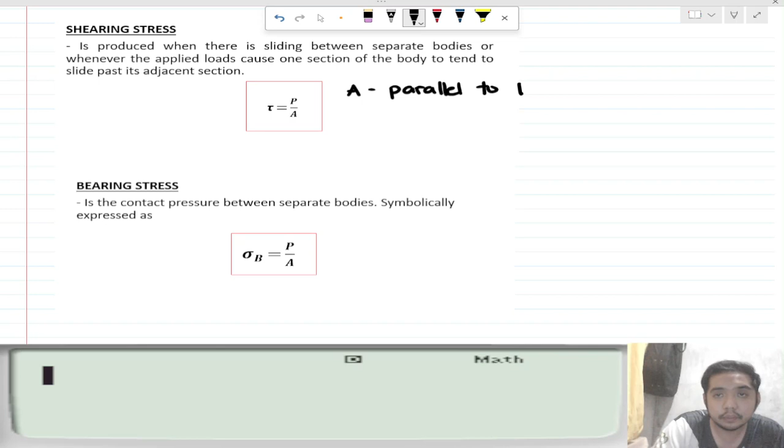Wherein yung ating area ngayon dito, yung area natin ngayon diyan sa ating shearing stress, okay, is parallel to the force, okay? So yun po yung pinagkaiba ng ating normal stress sa ating shearing stress. And shearing stress is represented by the symbol tau.

Okay, and then bearing stress, what is bearing stress? Sabi po dito, it is the contact pressure between separate bodies symbolically expressed as sigma B. So ito yung sinasabi ko sa inyo, wherein ang ating bearing stress ay isa din siyang normal stress, but ang difference nito is contact pressure lamang siya.

Ano, so yan, nakalagay naman diyan. Okay, so contact pressure daw yung ating bearing stress. Yan ay contact pressure between separate bodies. So yung isang body kumokontak doon sa isa pang body because of force applied to the contacting body, o yung body na nagko-contact doon sa isa, doon sa lumalapat sa isa. So yun yung ating bearing stress.

So parang ano lang din yan, normal stress, okay? Ang pinagkaiba nga lang, normal stress can be tensile or compressive. At itong bearing stress natin is always compressive or contact pressure. So sigma B ang ating symbol diyan, and yan ay P over A, wherein yung area natin diyan is perpendicular to the force or the area on the contact.

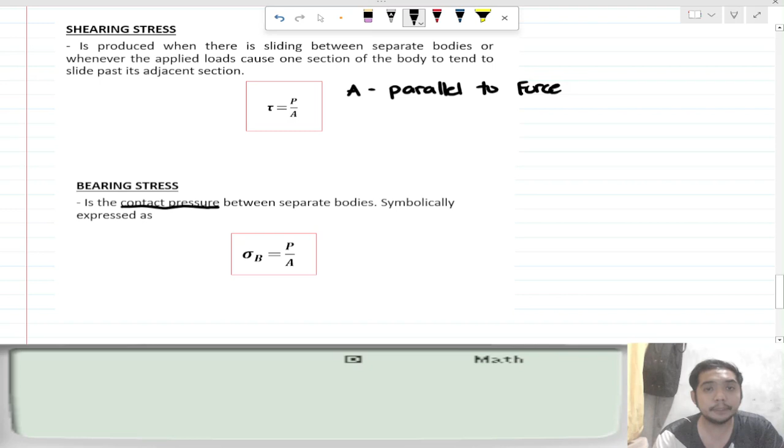Okay, so para mas maintindihan natin, sagutan natin itong ating problem. So sabi diyan, a rectangular piece of wood 75 mm by 150 mm in cross section is used as compression member as shown in the figure 1.4. Determine the axial force P which can be safely applied to the block if the compressive stress in the wood is 22 megapascal and the shearing stress parallel to the grain is 5 megapascal.

So ang drawing niyan, inside view, is nakaganto yan. At kitang-kita nyo naman, nakaganyan po. At then, naka-apply yung ating force dito. Okay, and then, ito daw ay 15 degrees. So ito, yung lapad niya is 75 and then yung haba niya po is 150.

So ngayon, yung ating force para magkaroon ng contact pressure or compressive stress, ito po yun. May component po dapat tayong naka-normal doon sa ating grain. At then, meron din tayong component na naka-parallel doon sa ating grain. So sabihin na lang natin na ito ay PN and then ito ay PS.

Okay, so sabi dito, yung ating tau, yan daw ay limited to 5 megapascal. At then, yung ating naman compressive stress, yan naman daw ay limited to 22 megapascals. Okay, so ngayon, para malaman natin kung ano yung force P na naka-apply diyan, kukuhanin natin o gagamitin natin yung both limits.

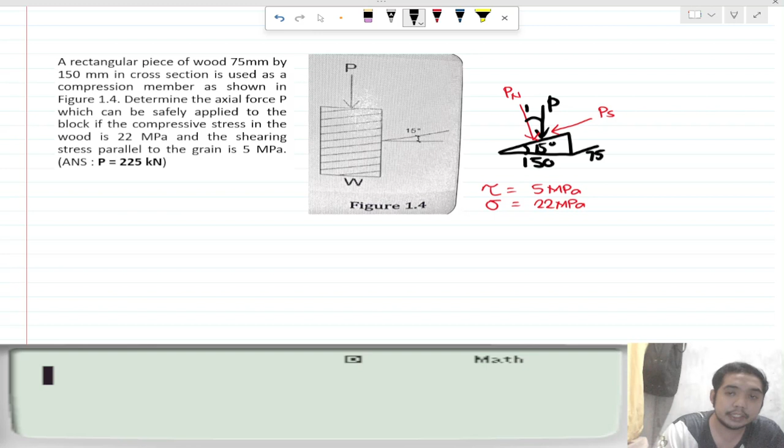So una, kuhanin po muna natin yung ating value ng PS in terms of P. So we all know kung ito ay 15 degree, so ito yung angle dito with respect doon sa ating PN o sa ating normal axis na naka-perpendicular sa grain, yung angle na yan is 15 degrees din. Okay, so based on illustration na atin pong nabuo, Pn is equal sa P cosine 15, while Ps is equal sa P sine 15.

And then, let's get the perpendicular area of Pn at saka yung parallel area doon sa ating PS. And to get that, kailangan po muna nating makuha, no? So ito kasi ay right triangle. Okay, so kailangan muna nating makuha itong length na ito, para makakuha tayo ng area. So para makuha natin yung area na yun, gagamit tayo ng cosine function. So cosine 15 is equal sa 150 over yung hypotenuse na yun.

So, let's say it is the length x. So, x is equal to 150 divided by cosine 15. So, that's the length of this part. So, let it be length x.

Now, what we'll do is use our limitations. For the first limitation, let's use our shearing stress. It says shearing stress is 5 megapascal. Review: megapascal is also known as Newton per millimeter square. So that equals

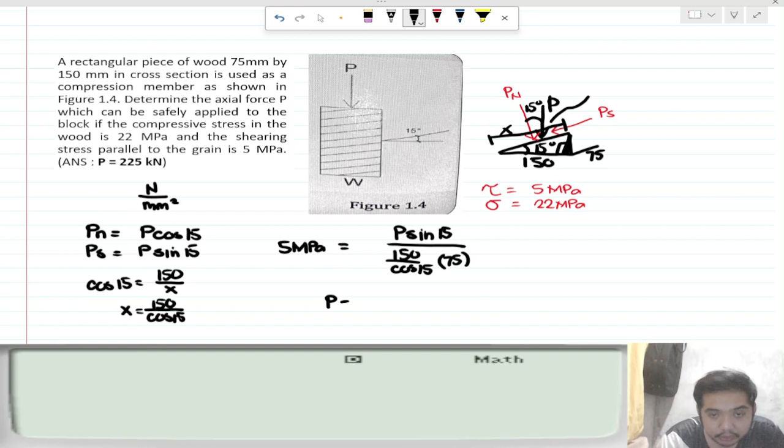So from that we can get P. What's the value of P? Let's evaluate by cross multiplying. So 5 times 150 over cosine 15, times 75, all over sine 15. And what we get is the value of P: 225,000 Newton.

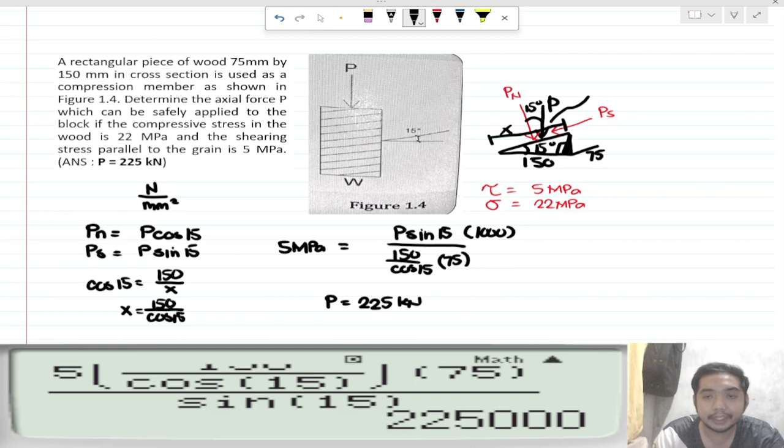It says our compressive pressure is 22 megapascal. So that equals P cosine 15 times 1,000 divided by our perpendicular area which is 150 over cosine 15 times 75.

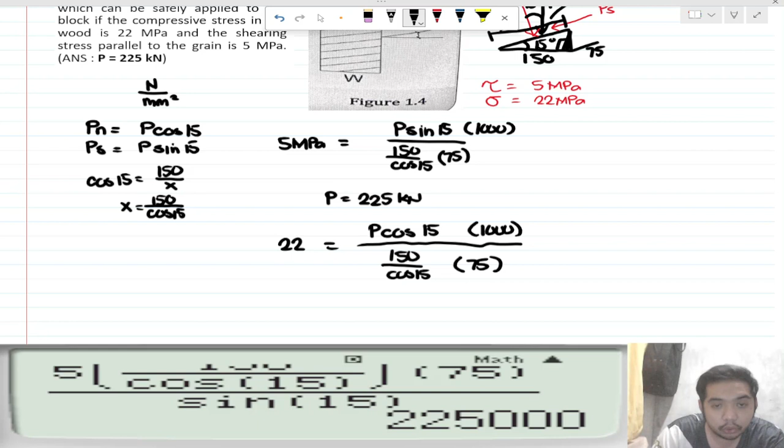So we get the value of P using the limitation of 22 megapascal for compressive pressure. So 22 times 150 over cosine 15 times 75, divided by 1,000 cosine 15. What we get is the value of P: 265.27 kilonewton.

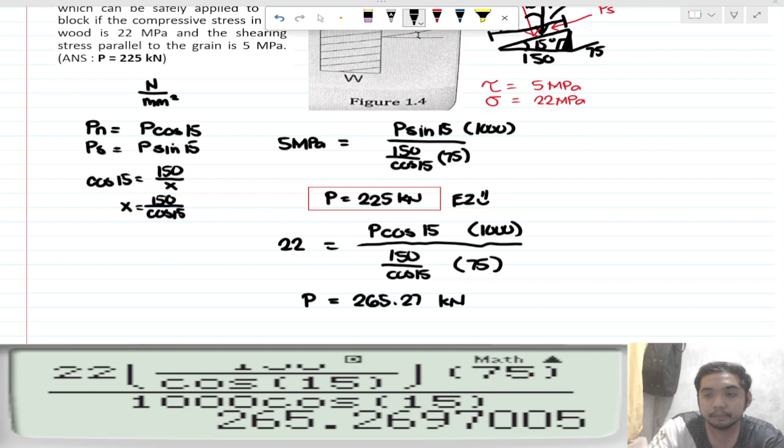So for better understanding, let's answer another problem. Okay, let's answer this example.

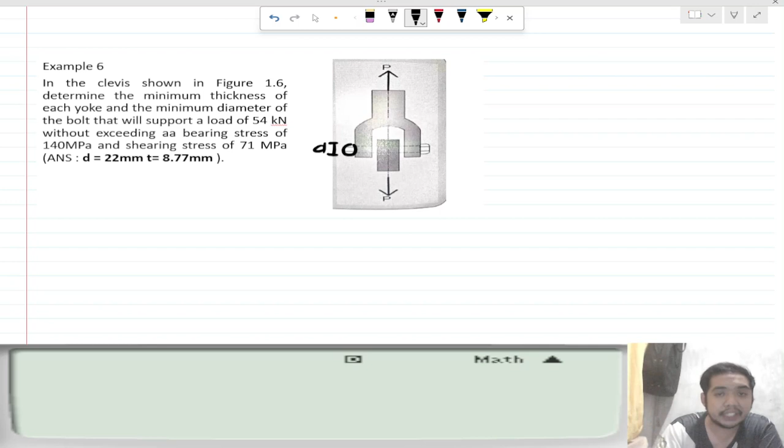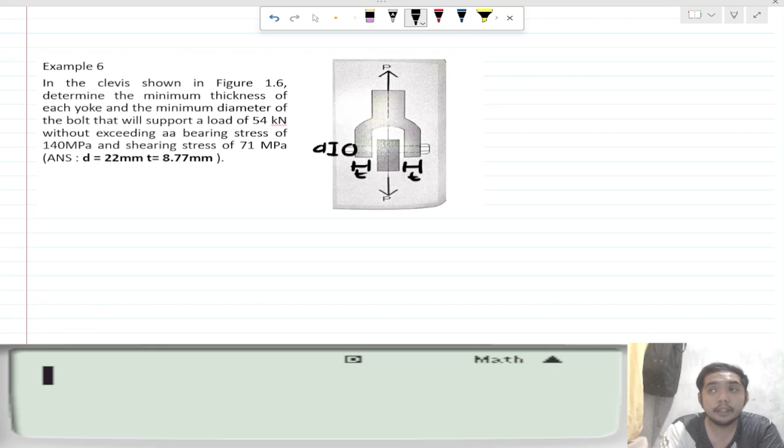Now, what governs where the material might break or experience stress is, of course, this yoke, because of the applied force P, which is 54 kilonewton. And for shearing stress, the body that will experience shear stress is this part here, our bolt.

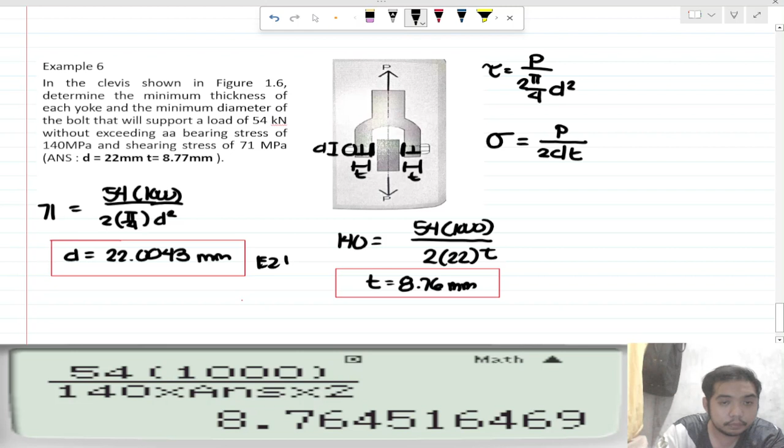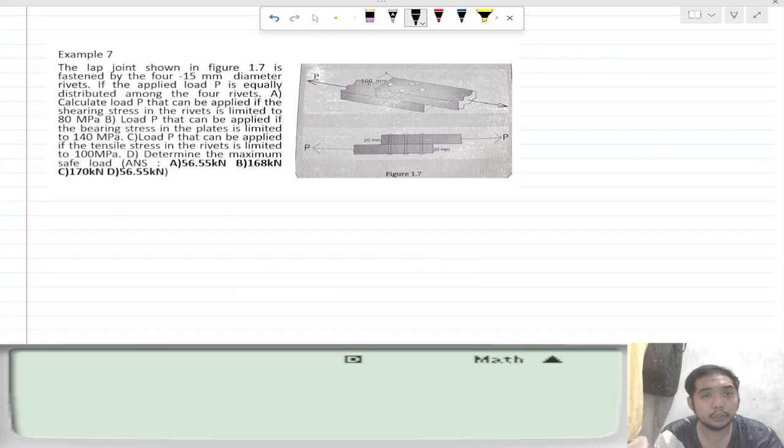Let's proceed to our last example for this video. The lap joint shown in figure 1-1.7 is fastened by 15 mm diameter rivets, if the applied load P is equally distributed among the 4 rivets. Calculate the load that can be applied if the shearing stress in the rivet is limited to 80 megapascal.

Load P that can be applied if the bearing stress in the plate is limited to 140 megapascal, and load P that can be applied if the tensile stress in the rivet is limited to 100 megapascals. So how do we do this?

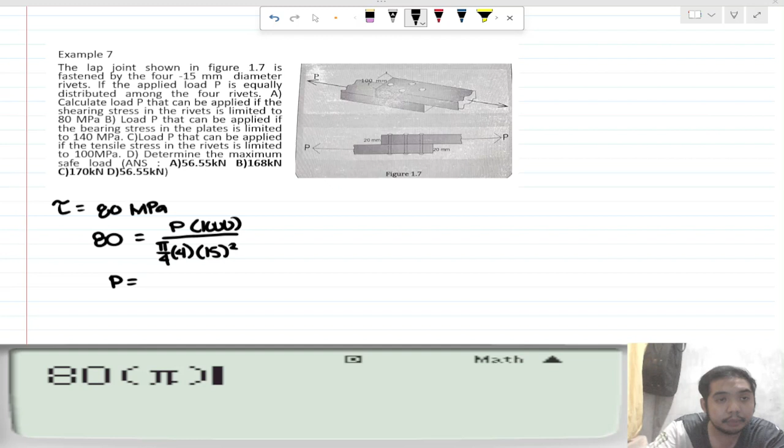56.55 kilonewtons. So that's our answer due to shearing stress. That's the load we get due to shearing stress.

The next question is the load P that can be applied due to bearing stress. So how do we get our bearing stress here? What we'll do is assume 4 bolts.

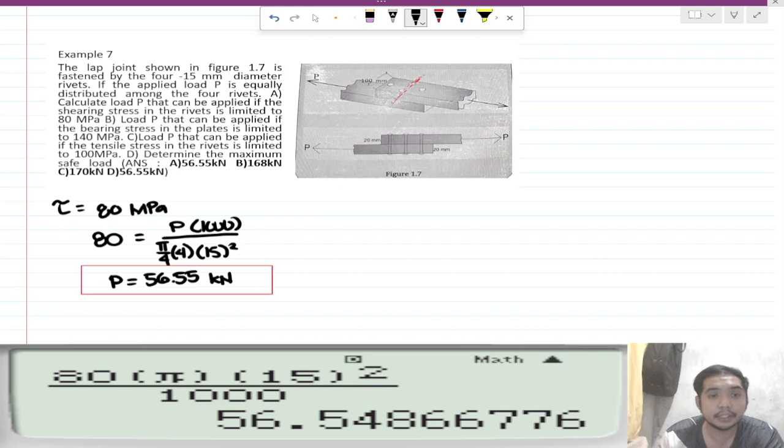So for bearing stress, what we'll do is: 140 equals P times 1,000 over, considering four bolts, so 4 times the diameter of our bolt, 15, times the thickness of our plate or lap joint, which is 20. Evaluating this, P equals 140 times 4 times 15 times 20, all over 1,000. So that gives us 168 kilonewtons.

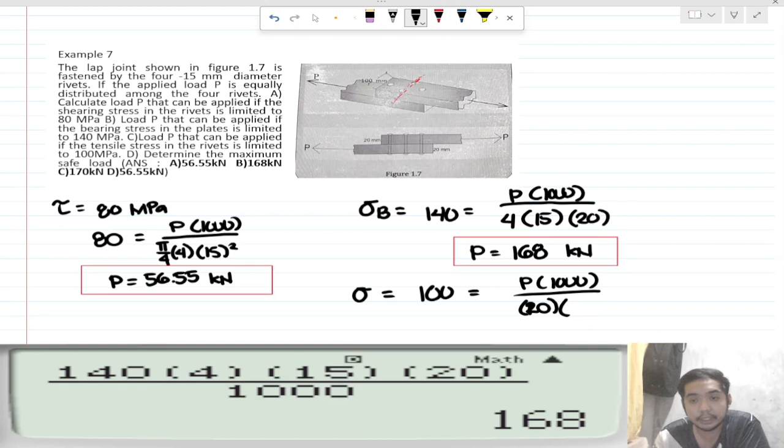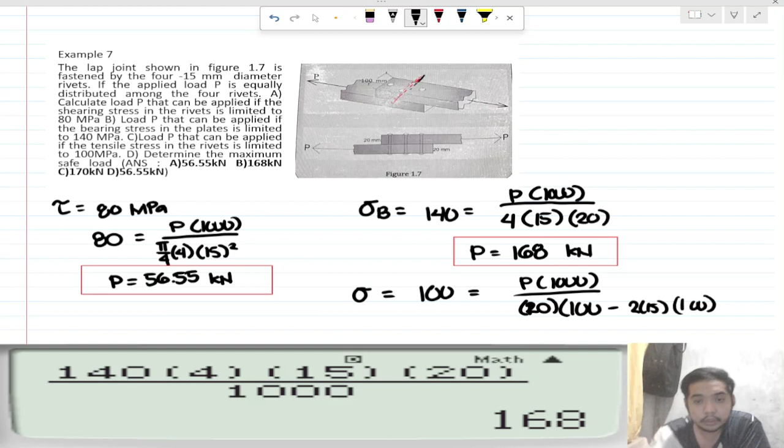So what happens there is force P equals 100 times 20 times 100 minus 2 times 15 times 100, divided by 1,000. So we got 140, but that's not yet the correct answer.

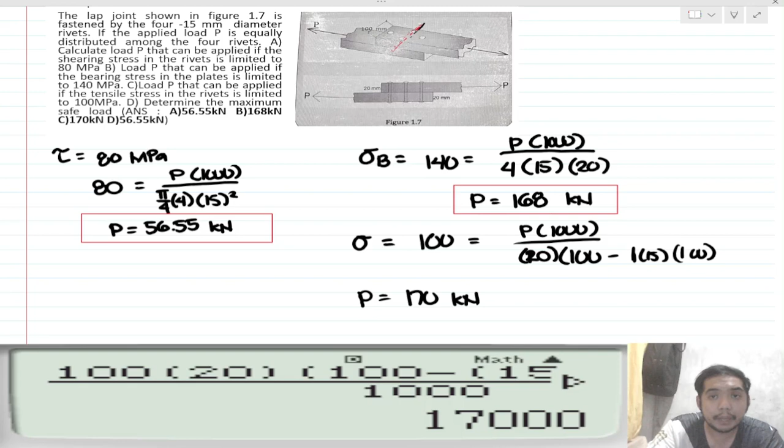Now how do we answer letter D? Determine the maximum safe load. That's easy - always choose the lowest value. So the maximum safe load is 56.55 kilonewtons. That's our final answer. Always choose the lowest value as the strength of materials, or the capacity of the materials.

I hope you learned something from our video today. This concludes our second video for the MDD session. Thank you and God bless.